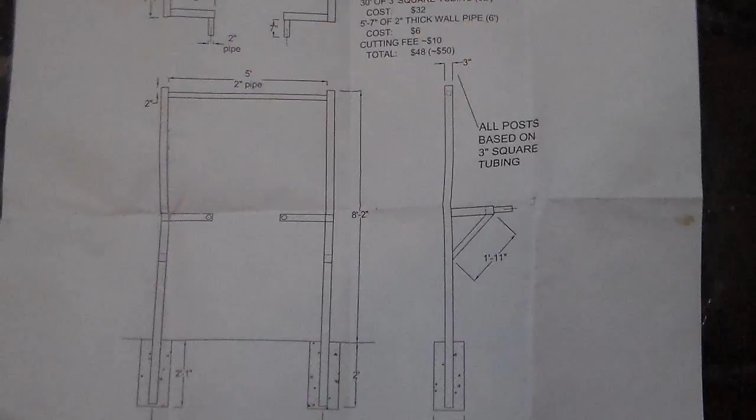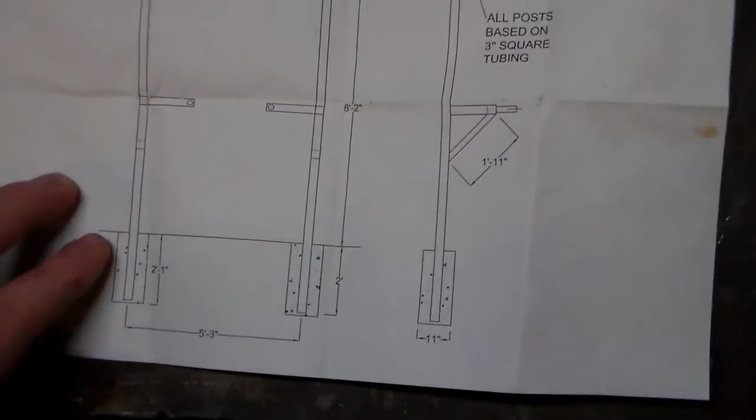Alright YouTube, today I'm building one of those outside pull-up and dip bars, the things that they have concreted in the ground about 2 feet, and then it stands up. You see them a lot at parks, not too much at people's houses because obviously they are stuck in there pretty good, and a lot of people like those movable ones you can buy for like 200 bucks from Academy.

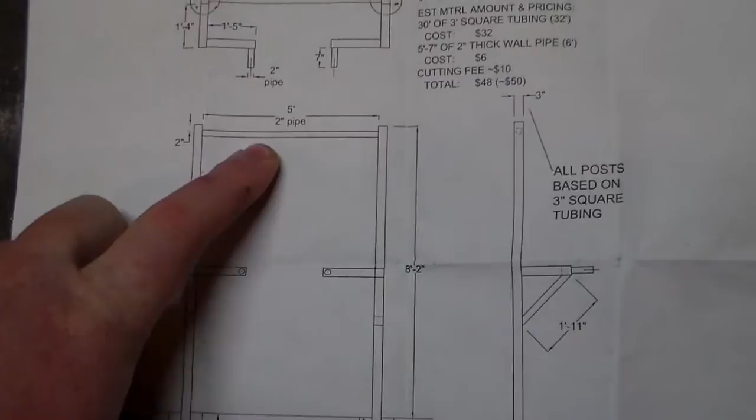So what I'm going to be doing, the upright posts are 3-inch 14 gauge square tubing. The upper bar for the hands is going to be 2-inch pipe. I believe I got it out of a scrap pile, so it's 1/4 inch, but it by no means has to be that thick.

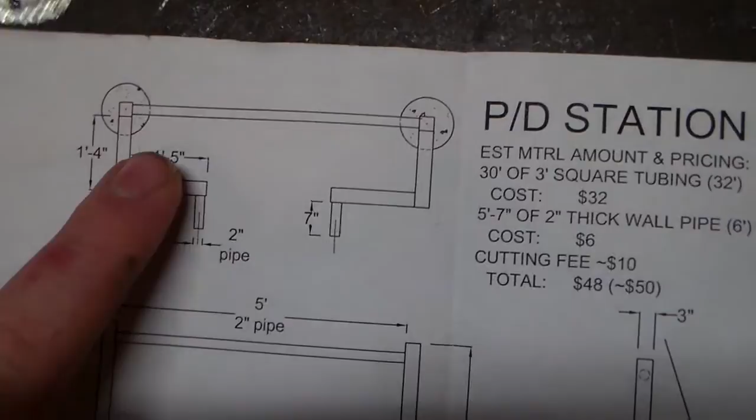The design here for the dip section, it was done this way so that the person doing pull-ups isn't having to try and dodge these bars, hit himself in the rib cage or anything. And I am a little worried about how it's gonna hold up.

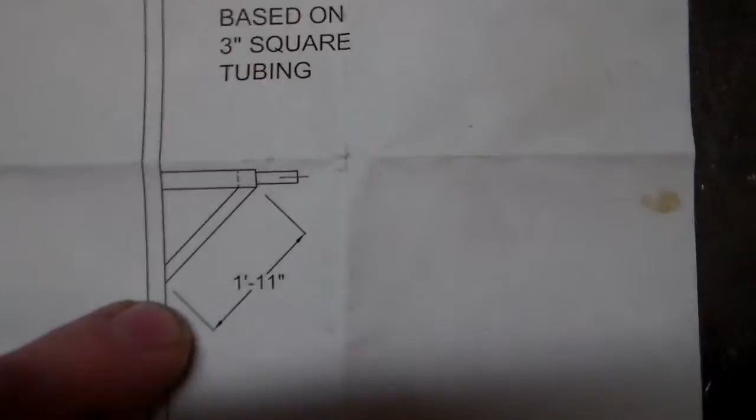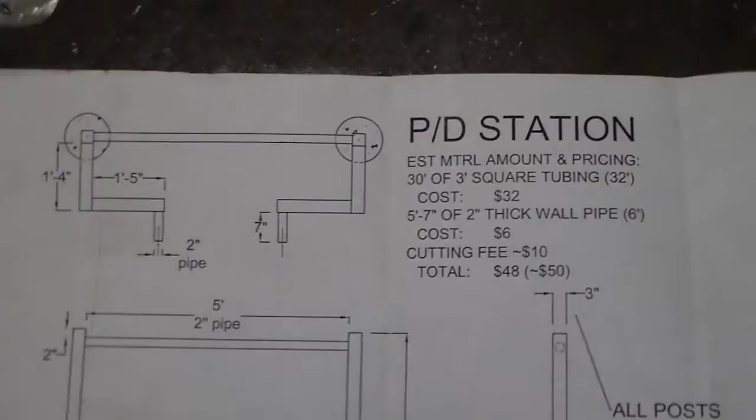So the only bracing it's got is this little 45-degree thing here, which may or may not be altered while I'm building it. But you've got this whole little bracket section hanging out with no bracing. So I guess we'll build it, see how it works. I'm 300 pounds, so if it can hold that, it should do good. Alright, check in with you when I have it going.

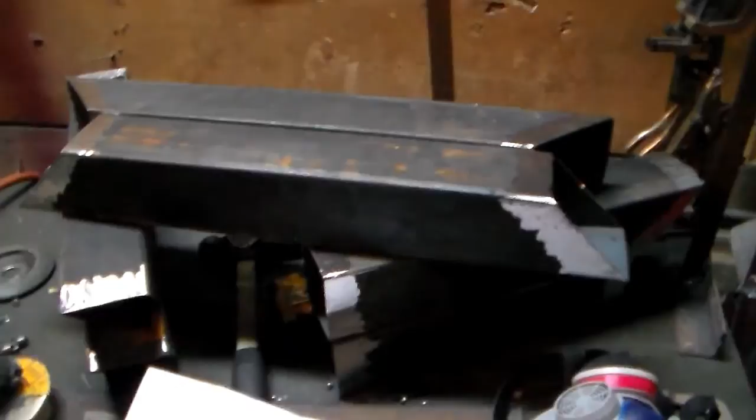Alright, so I cut all my pieces, ground them all down here at the edges, deburred them. That's very important for welding, so make sure you don't forget to do it. Sometimes there's a bit of grinding dust on there, so I even hit it with a wire wheel before I go to weld. But that's going to be another day or two.

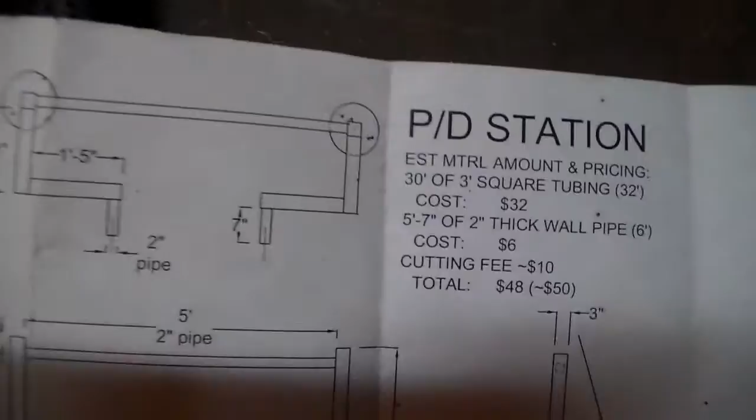If you'll notice, I did change the prints a little bit. Right here at that edge, I've turned those into 45s. Now that means this 1 foot 5 inch dimension, you're going to have to add 3 inches to it, or else you'll come up short and you'll be too wide where these handles are. So make sure you add 3 inches. It's 1 foot 8 inches. I'll try and remember to update the prints if I put them in the summary underneath the video.

Another thing, I'm also going to try and add the dimension here for how high this is. And then that should cover all the corrections. I'm sure I'll find something.

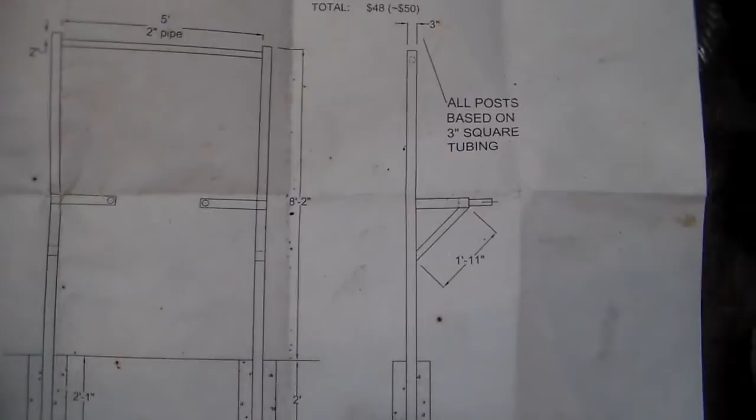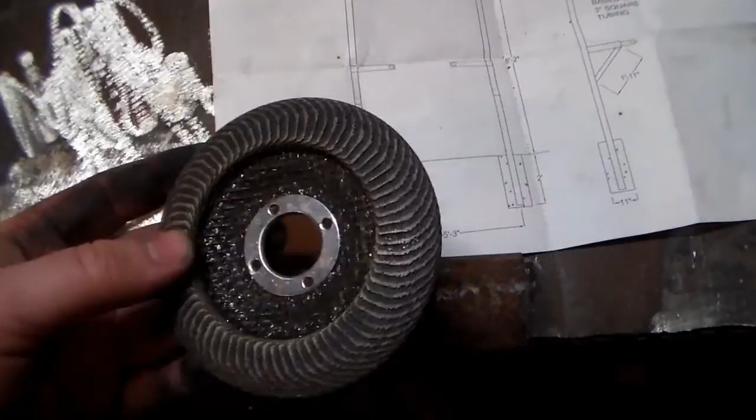Something that's important, I use a grinding disc on this. That gets it nice and clean, but on this pipe, you'll put edges all over it and it'll suck real bad. So make sure you use a flap disc. You always want to use a disc like this. I'm sure people out there know something better to use, but this is what I use. Gets it nice and smooth, gets all this rust off, good for painting, and it doesn't put an edge on your pipe, so it'll come out nice and good.

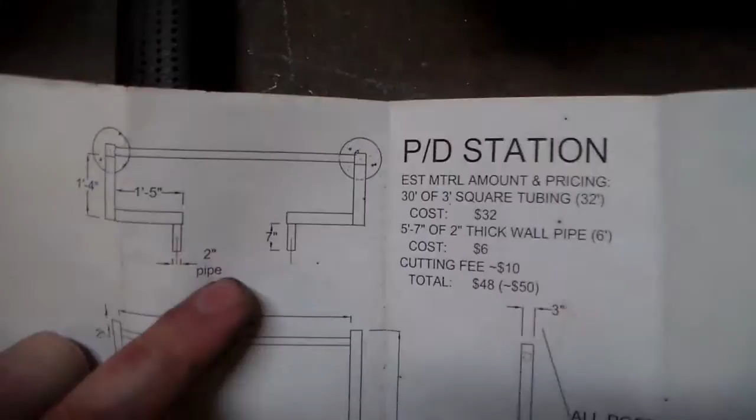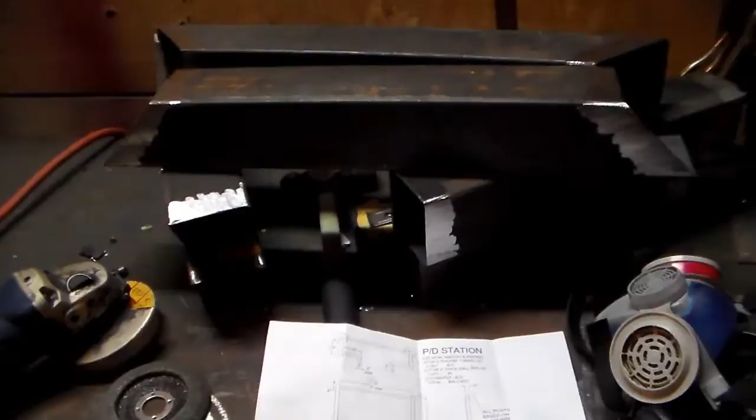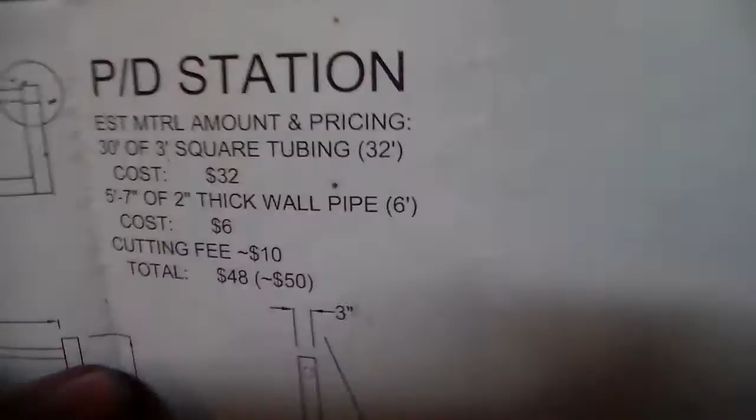Alright, well, what I've got left to do: since it's raining here, I decided I'm going to go ahead and fit these arms up for the dip. And then after I fit those up, I'm going to weld them out, grind them smooth, and then tomorrow I'm going to get the other posts I've got out in the yard and finish it up. I haven't dug my hole yet because of the rain and some other things. I'm partly lazy.

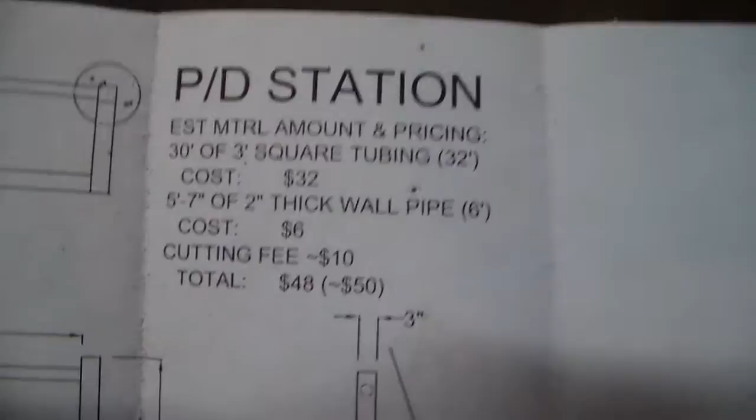At the scrap yard, if you notice here, I put 30 foot of 3 inch. It's 3-inch square tubing. The cost was $32. My scrap yard sells them for about 40 bucks each for 20 foot, so it's 80 bucks for 40 foot, and that's what's needed for this project. You have a little bit left over, or some parts if you mess up.

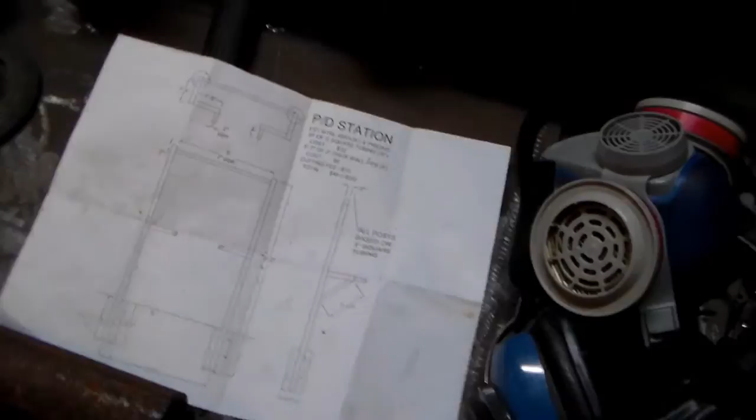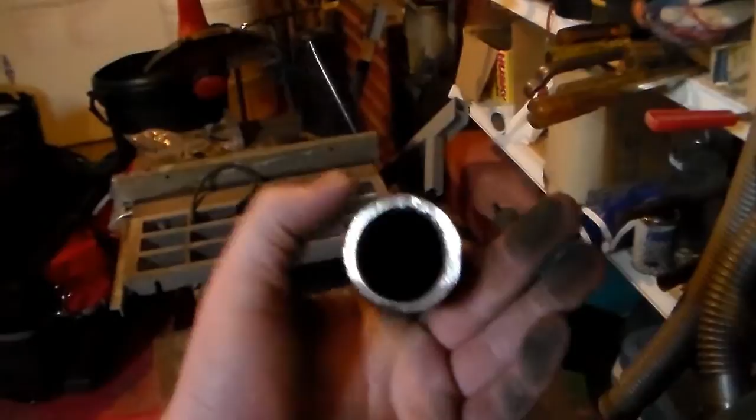The pipe, I found a piece of scrap pipe that was straight. Thickness is, I mean, I'm 300 pounds, but this is gonna hold me up forever. I don't see that rusting anytime soon. It's pretty straight too. It's got a little bend to it, but you know, for a pull-up bar, you don't need anything better. All right.

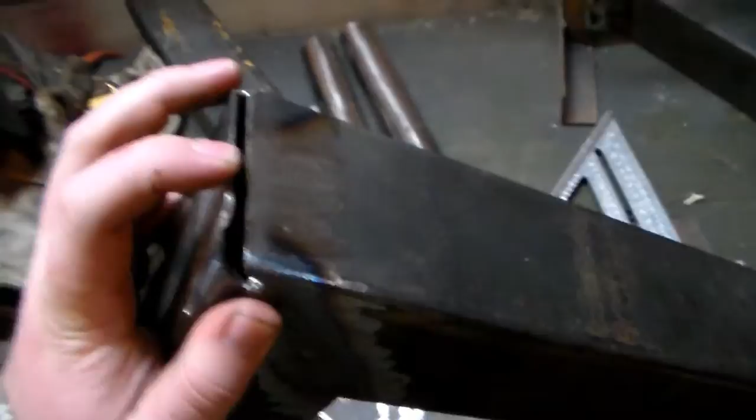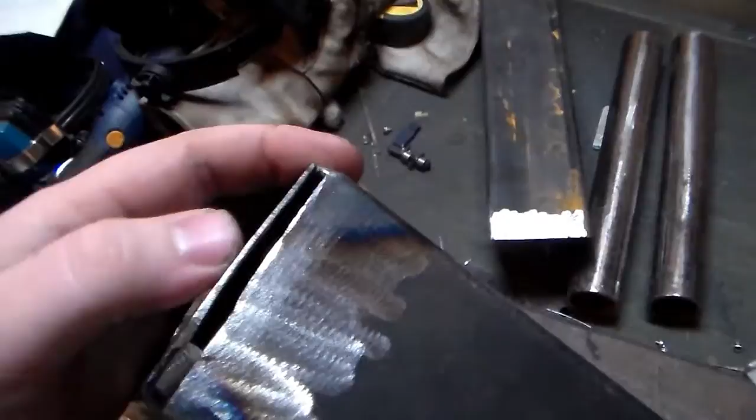Well, as is normal for me in welding, nothing ever comes out quite right. Everything's always a struggle. I wasn't thinking about it. I was planning on stick welding this. 14 gauge is just really... I tried using 6013, and with this poor of a fit-up, it just wasn't going to work. So I had to break out the TIG welder.

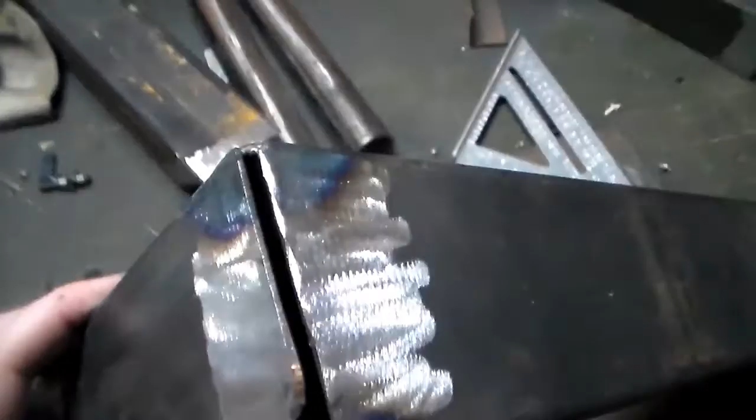Keep in mind my TIG setup is scratch start, 1/16 inch thoriated tungsten, and 1/16 inch filler. So yeah, the spots that I've put it were just as wide, but this corner right there, I decided to stop and let the metal cool off a while, because that's going to take a while to fill.

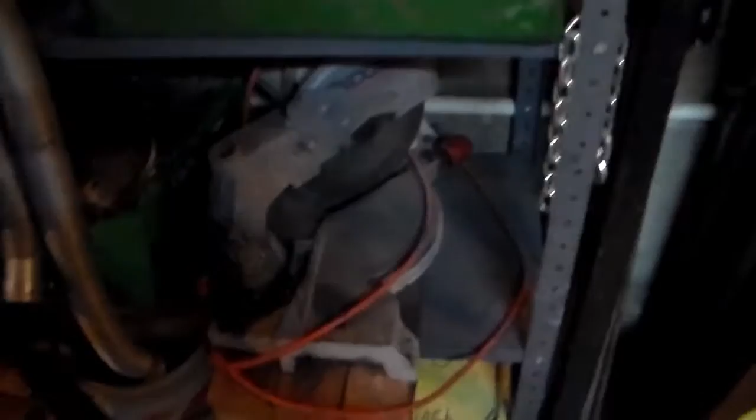So if you're watching this video, you probably don't have a pedal TIG, probably scratch start or stick or something. So make sure when you cut it, something I didn't do when I did it, make sure your beam is level. I used this chop saw here, and it was just sitting down on the ground, and my beam stretched out all the way, and I didn't make sure it was level. So when I cut, well, it made quite the mess of things. So that's going to be a joy to fill.

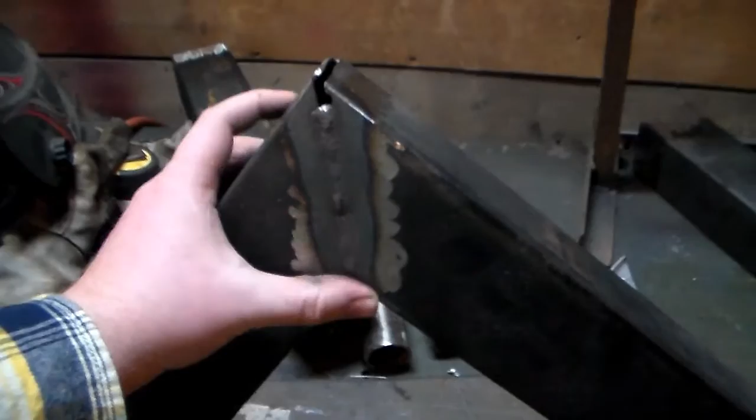I got this side, and then I've got this other side to do, but the gap isn't too bad there, so that should go pretty good. But so far so good. I'll eventually get that filled in. This would definitely be a good time to have a MIG machine though.

Alright, got the dip stuff all welded out. After looking at them, I'm not sure which would support better, if the 45 bracket there was up or on the bottom. I'm going to think about it overnight, and then we'll decide if we're going to put the handles on tomorrow or wait for a little bit. But I think I may put that up top. I don't know. I'm not 100%.

Alright, so I got these all welded up, and I've gone ahead and put one on a beam. So that should hold. I've tested these welds. They should hold me, so that's pretty good. I'm about to turn this post around, and I'll do the other one.

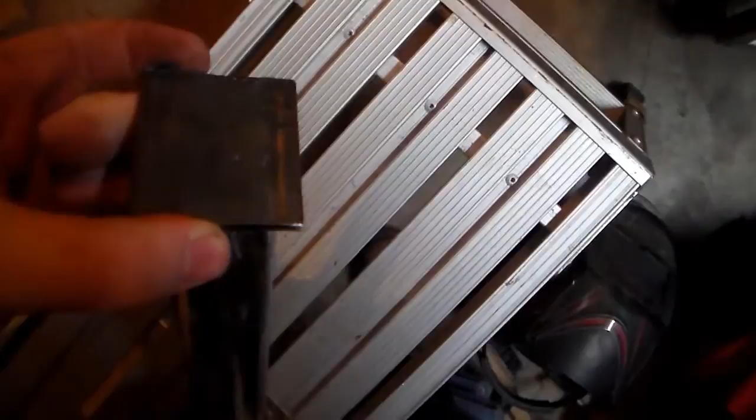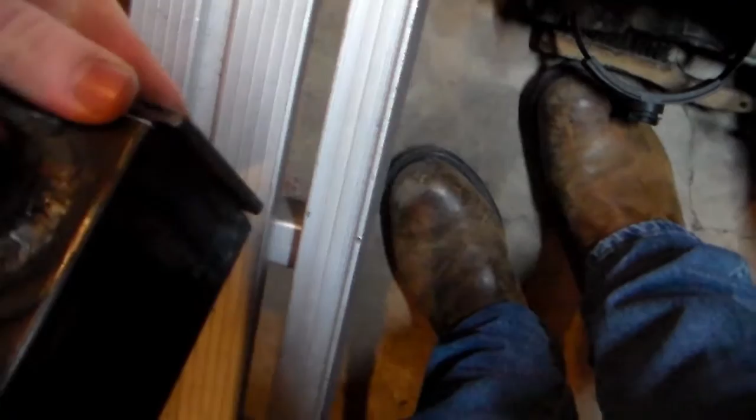Something I didn't have on the plans is capping the ends of these, as well as the end of this. How I did it, to be honest with you, I have these 3/16 welding coupons, I got a whole bucket of them. I held them over, tacked them on, and then just ground it off until it was round. Fully welded it out, and then used a flap disc to make it smooth. Did the exact same thing on the end, except I had to weld two of these together to cover up the whole thing, and then ground, and did all the same thing.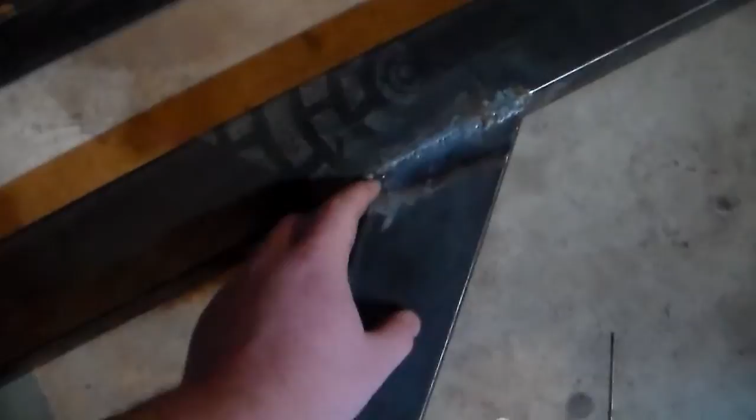Covers it up quite nicely. It should be mentioned that I also covered up this post here. That's going to be at the top. Don't want any water to get in there. Fully welded all this. I'm new at TIG welding. I'm sure if I had a bigger collection of cups or smaller cups or whatever, I could have got in there. And I've got a little spot I need to go back over right there. I know those aren't pretty, but

getting down in there and that corner weld, I just used my little flux core machine. I didn't trust myself with TIG. You know, this is going to be down, so when it's raining, it might have a tendency to collect water there, so I didn't want to leave it open. So I went ahead and welded that with the flux core instead of giving it my best TIG shot.

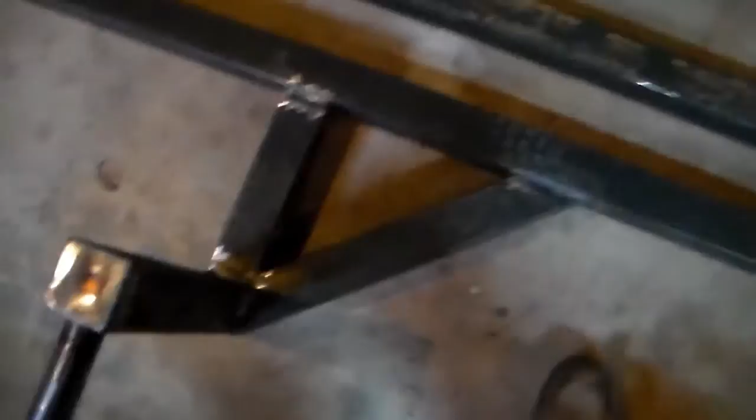So after I put this side on the other side, I'm going to spread it out, and I'm going to put this bar over here that took me probably 30 minutes to grind clean and smooth. It's 5 foot wide. I'm going to put it on, and I cut out these to be the exact length of the bar. I'm going to put one at the top, and I've got another one here that I placed somewhere. But I'll put the other one at the feet so I make sure it's good and even, and it's 5 foot wide across the whole thing. Then I'm going to take it out and paint it.

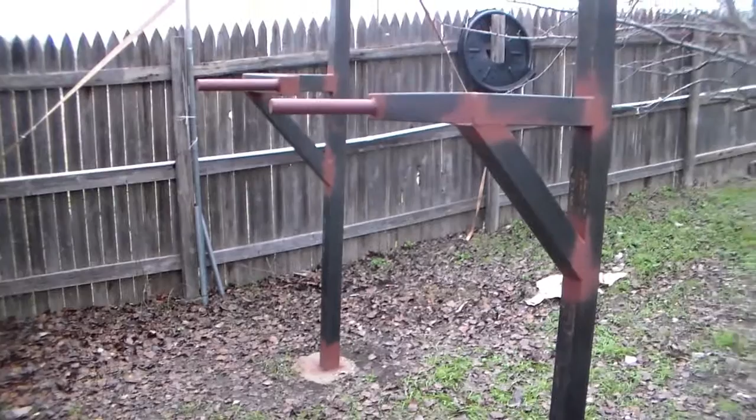Those are level, it's just the way the ground is. As you can tell, I'm on quite the hill. And there it is. I'm using the straps to hold this thing level while the concrete dries.

Well, as you can tell, I'm not too good at pull-ups. I haven't done them in quite a while. I hope to change that soon.

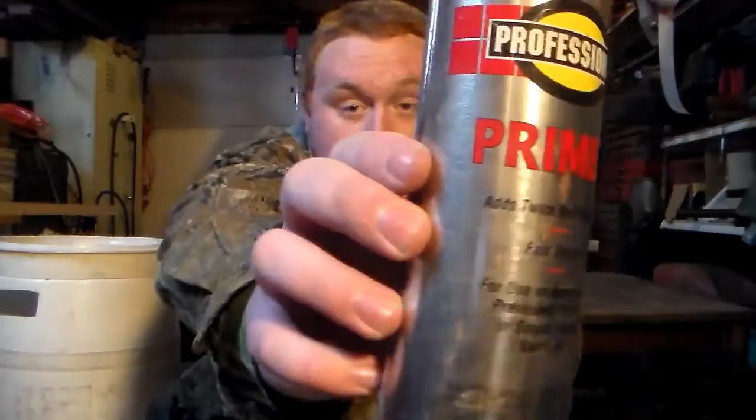The paint I used out there on it kind of came out brick red. I really thought this would be brown, but I'm not mad about it. I don't know if they even make this anymore. It's been in a paint drawer for, who knows, probably a couple decades.

You know, I went and measured it. The dip bars are not level. If I raise that right handlebar, it would be. I don't think it's going to be an issue. Pull-up bar is good. It's perfectly level. Concrete set. I gotta take the straps off here in another day. I used those to keep it level while I did it. So yeah, that's that project.

I'm out of this. I don't know if they're gonna make any more of it, or if I can even find this color. So I'm probably gonna end up painting it all. But if you like that, it's Rust-Oleum primer, bare metal. Doesn't even say the color. Just has a brown lid. Comes out brick red. All right, have a good one.